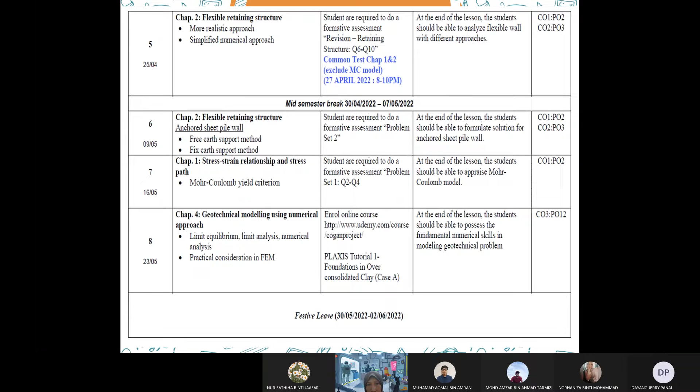This will consume 4 weeks, from week 8 to week 11. Then week 12 to week 14 covers applications of Eurocode 7 in geotechnical design, where you will see how we design retaining walls, and how we design shallow and deep foundations using the Eurocode standard. Previously if you looked at chapter 2, we designed retaining walls using the gross method, the British standard method.

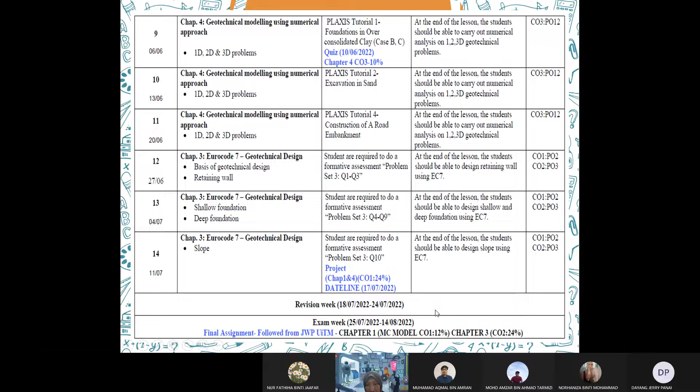So that's all for what we call the lesson plan. It's important that I share this lesson plan with you. Then okay, a little bit on the OBE.

Where is the OBE? Okay, I already shared one PDF on OBE. And if you look here, I've also attached the QR code for OBE. So I think you need to take your personal time to review what is in the OBE, for example what CO1 is, what PO2 is, what PO3 is. I hope you are familiar with it.

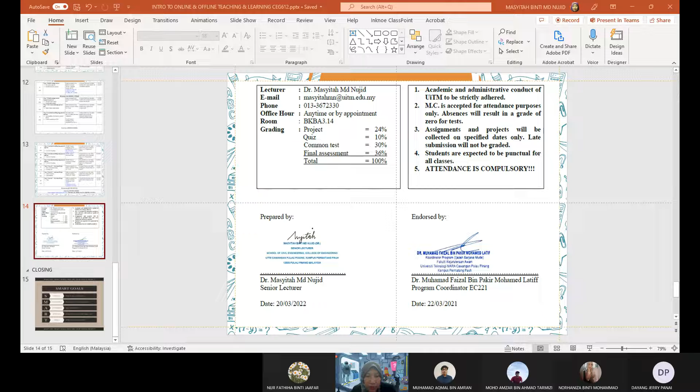Okay, now we go to the first overview on the topic for this chapter. So I will go to... okay, this one.

Before we go into more detail on stress and strain response, I think the stress and strain response is quite familiar in civil engineering. If you remember when you took construction materials, then reinforced concrete design, all that we talk about is how the structure responds when subjected to loading. These are the things you have to understand, to differentiate how the material will behave for different kinds of properties such as concrete, how it reacts when a load is applied.

And when we talk about rock, we have hard rock and soft rock. And also soil, there is normally consolidated clay for example, and over consolidated clay. Then there's sand which is dense type, and also loose type. So how do we look at, in soil mechanics specifically, how clay and sand, these two major groups, behave or react once subjected to loading, whether low loading or high loading.

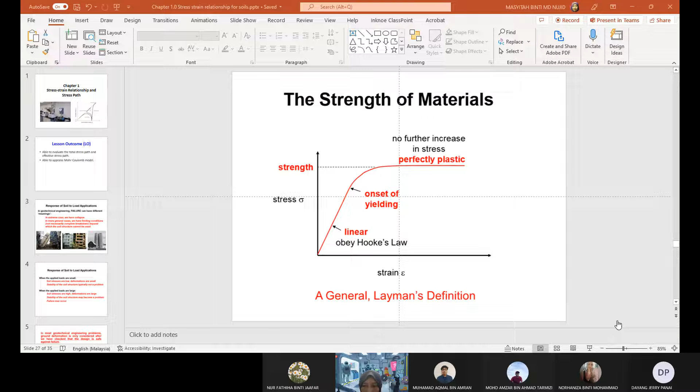Yes, sorry, uh, Madam gerakkan slide ke? Tak jadi, dia tak gerak kat slide. Nombor berapa ni? Tak pasti daripada awal, the strength of materials. Yang mana? The strength of materials. I think there's a problem yang mana dia mungkin tak boleh view as a large full screen view. Kalau yang ni nampak? Still tak gerak lagi, still tak gerak. Let me check what's wrong. Okay.

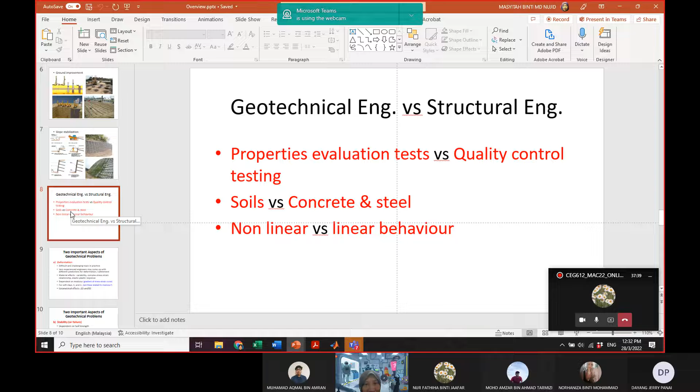Kalau yang ni? Sekarang kat geotechnical engineering. Okay. Alright. Thank you, Madam. Saya besarkan, nampak? Nampak, Madam?

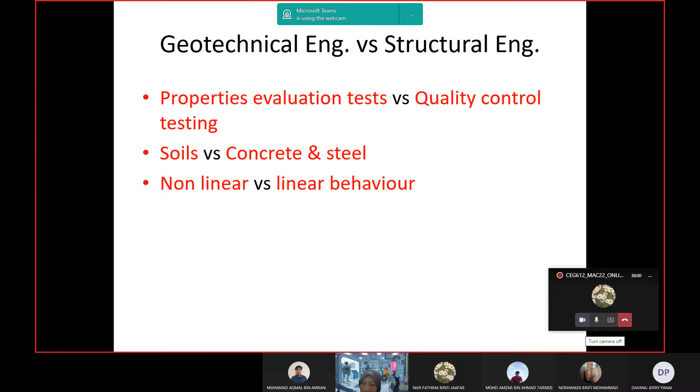Okay, so back to last time, I stopped at the comparison between geotechnical and structural engineer. Don't worry about the slides, I will share later or you can download from UFuture. Okay, in geotechnical aspect, there are two things you may need to consider.

First is the deformations and the stability. On the part of deformations, we play around with the soil characteristics and properties, and how the soil responds under different loading, whether saturated or unsaturated, or whether it is drained or undrained. These are things you need observations or detailed analysis on, how it deforms and how to maintain its stability. So it is a very difficult and challenging topic in practice, and it needs a very experienced engineer to predict or solve any problem regarding the deformations.

Talking about deformations, if we go to the next topic, stress-strain behavior, there is one parameter we call the strain. Strain is one indicator of how you are going to measure the deformations. The strain itself is the change before and after to the original shape of the material after you apply a load. From there you can get the percentage of deformations, whether small deformations or large deformations.

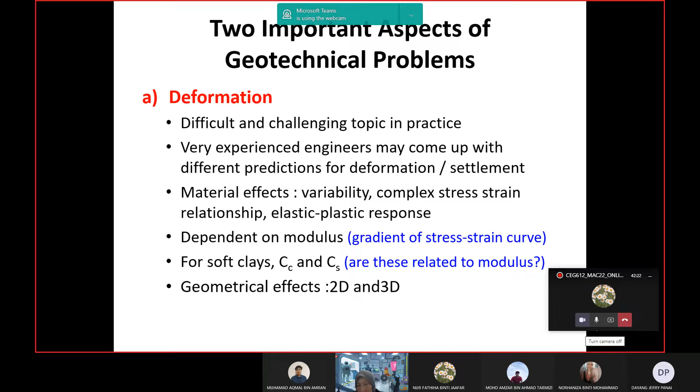Okay, about the stability, so it depends on the soil strength. When I highlight soil strength, you should be familiar with it - the simplest one is the Mohr-Coulomb, for example. If you don't remember, just go back to your textbook on soil mechanics and look at the common things about strength.

What is the strength? Does it have only one strength, or can it have a peak strength, residual strength, and ultimate strength? How do you want to identify all those strengths I mentioned from just one curve, from the stress-strain behavior? Where do we call it peak strength? Where do we call it ultimate strength? Where do we call it residual strength? Because all the strengths I mentioned rely on the stress-strain behavior. If your deformations occur in small displacement, what do we call that?

Ultimate strength, or we can call it peak strength, or it is residual strength. But if the strength occurs in large displacement after a few years has taken place, so it is no longer ultimate strength, it may become residual strength.

So just go back to your textbook, open it up and turn to a few pages, look at the definition of strength, and then what are the parameters that control the strength of the soil. So you will see the comparison of how it behaves for sand material or for clay soil.

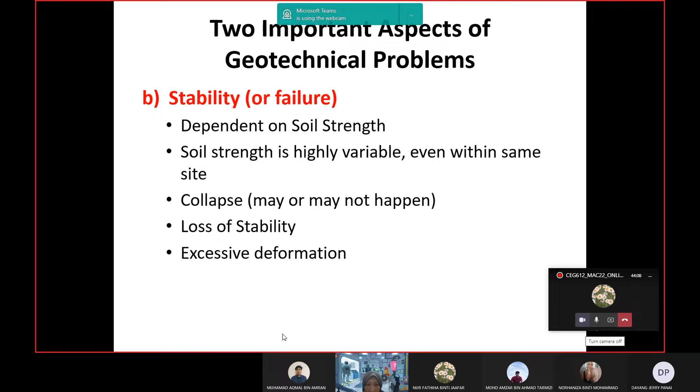Okay, among them: collapse, loss of stability, then lastly, as I said, deformations. So next is on this one.

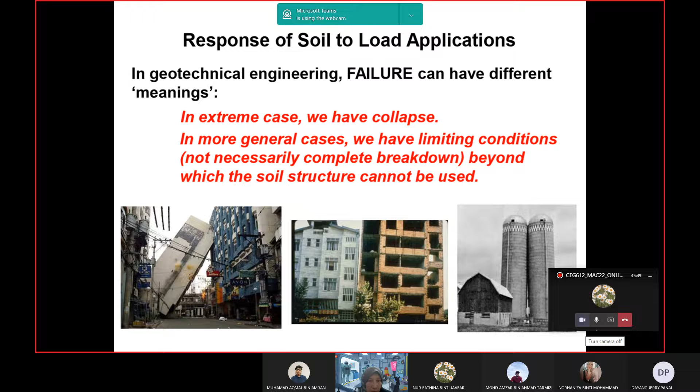As I said, I already mentioned this just now, talking about small strain, large strain. How small strain and large strain are related to loading and also related to stress. So usually when you have soil stresses that are very low, they also produce a small strain or deformation. So of course there is no big problem.

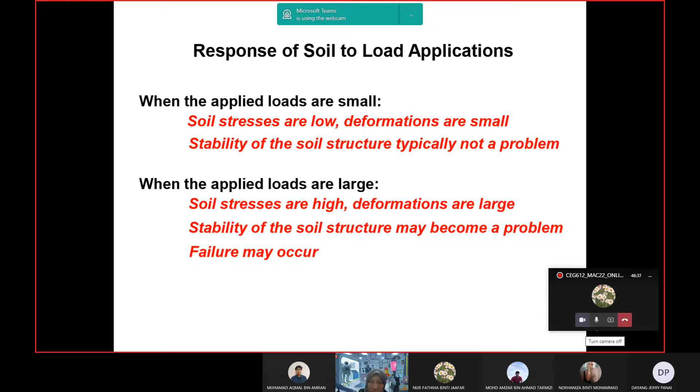But then when you apply a large structure or large loading, there is a chance to have a large deformation or large displacement. So this is the time that you need to consider the failure that may occur.

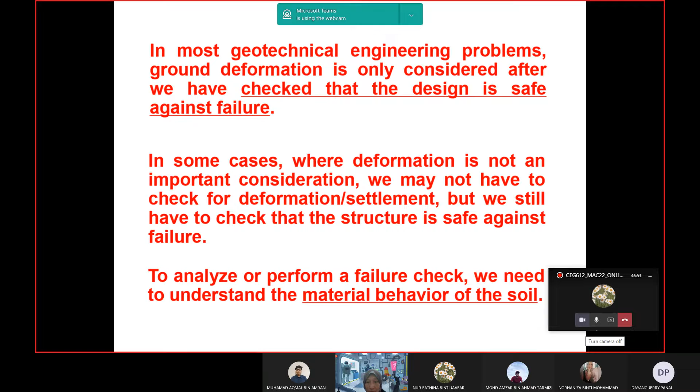Okay, in geotechnical engineering, as I said, you have to check on the design, then you need to do supervision and monitoring, and then you have to do some investigation to understand how the material behaves. And it also depends on two things: the first one is the stiffness and also the strength.

Okay, what is the stiffness? The stiffness of material defines how much deformation the material will undergo given a certain stress, or more appropriately in soil, the stress increment.

Such stiffness as you usually hear is the Young's modulus or shear modulus. The Young's modulus is easier because we can see it on a linear line where you have a linear relationship. But some materials don't behave as linear, they behave as non-linear.

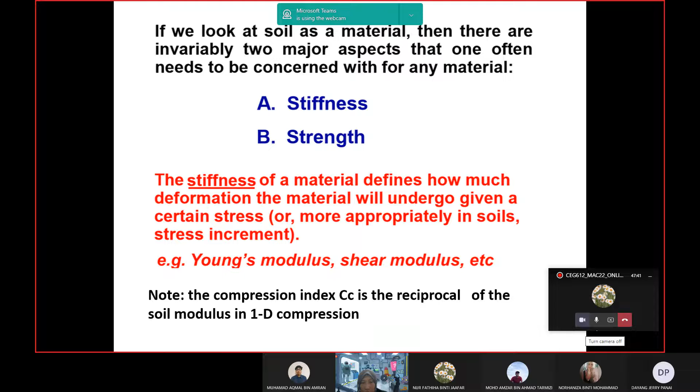So where do we get the stiffness of the material, where can we get the material from? Some of it is represented by the compression index, CC. That's how we can say the stiffness and also the strength of the material.

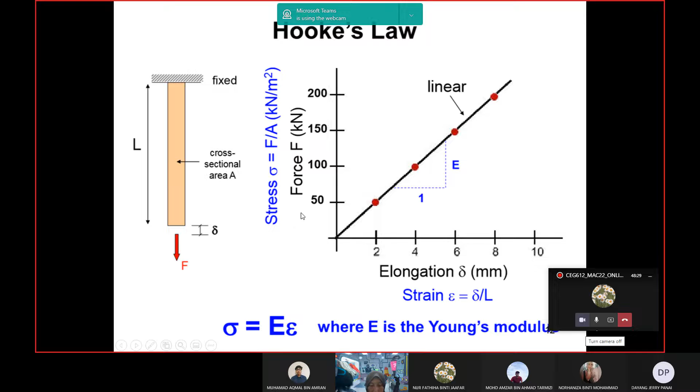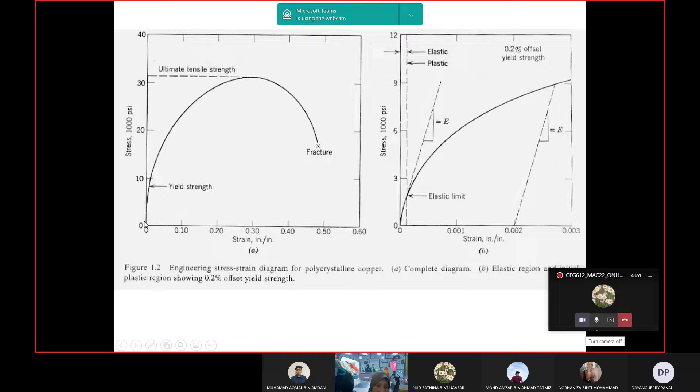Okay, this is one example of how the material behaves under loading. So you can see that some of the curves, some of the stress strain behavior, does not begin with a straight line. It can begin with a curve, or for some materials we can clearly see its linear relationship. Somehow the material can show you the ultimate point and then show you the maximum and also the critical point.

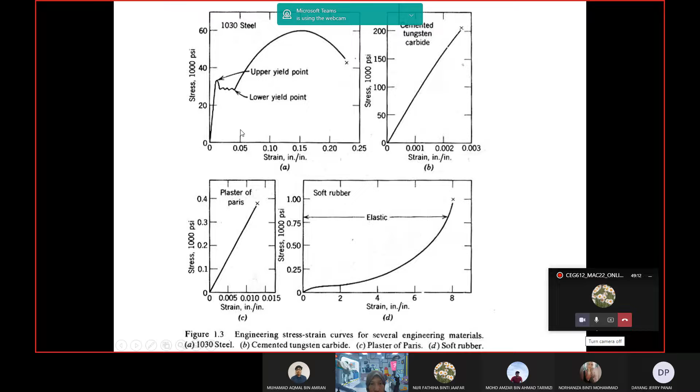So all these things you need to differentiate in order to explain the behavior of the material in terms of the stress strain relationship.

Okay, this is just a simple explanation. Some books call it ultimate strength, some books call it peak strength. But if you look at textbooks on soil mechanics, at the peak or maximum point on the curve, we don't call it ultimate strength anymore. We call it peak strength.

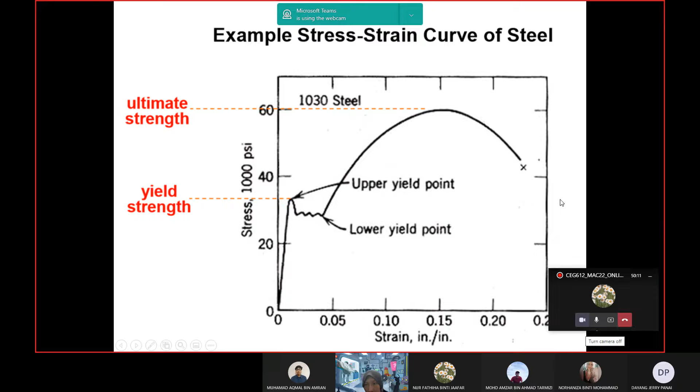Where does ultimate strength occur? Ultimate strength is when the stress or loading experiences a slight reduction, then the shape changes again - that is the condition where you will see ultimate strength. And then at one time when you see the stress and loading does not increase or stays constant linearly, at a condition where strain continues to deform or have displacement, that is the point called residual strength. So they are not the same - peak strength, ultimate strength, and residual strength.

So these are examples of the stress strain behavior of material. I said material, not stress strain behavior for soil specifically. Among the behaviors you can see representing stress strain behavior, for example linear elastic. You know why it's called linear elastic? Because it's a straight line relationship between stress and strain.

Then there's also non-linear elastic, also elastoplastic. Elastoplastic is where the material behaves elastic, then they can behave as plastic. So there are two conditions. And the material can also behave linear elastic, perfectly plastic - for example if we want to model soil behavior, or elastoplastic strain hardening, or elastoplastic strain softening.

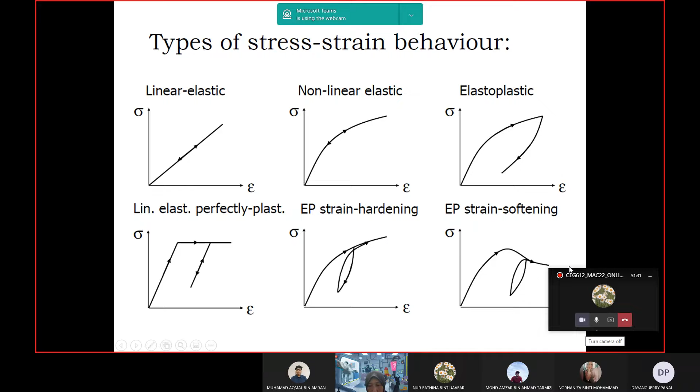Just to show you the difference between tangent modulus, initial modulus, and secant modulus. Secant modulus can be seen at the peak of the curve. Tangent modulus we can see at this tangent position, on the tangent curve. On the curve we take its tangent, so we get the tangent modulus. Secant modulus, if I'm not mistaken, can also be considered called E50 there, secant modulus.

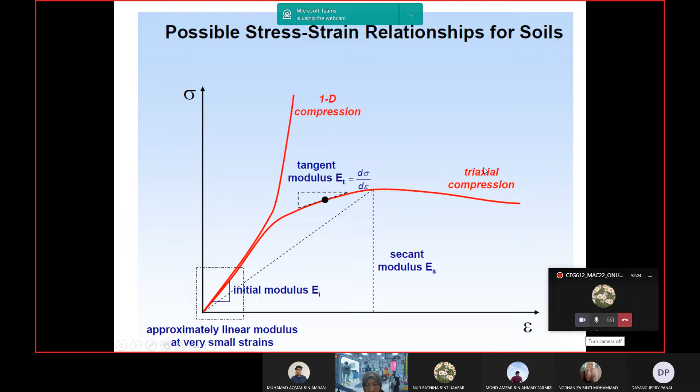Or this we can check again. One more is called initial modulus. So in soil testing we can get the stress strain behavior from one dimensional compression or triaxial compression. Triaxial compression is the thing you commonly do in triaxial testing.

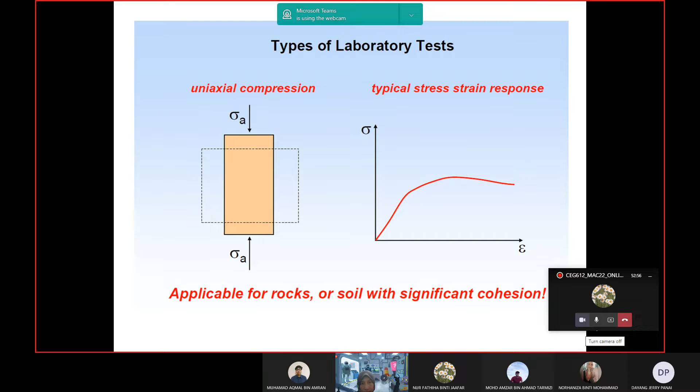So these are the laboratory tests, for example uniaxial compression and also the typical stress strain response. This is applicable for rock and soil with significant cohesion. Okay, similarly at this part you will see the difference between uniaxial compression and triaxial compression. In uniaxial compression, you are only subjected to loading axially - that's what we call uniaxial compression.

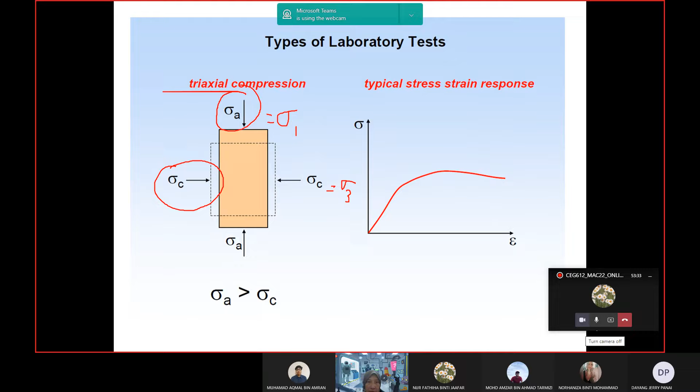However, when you have what we call triaxial compression, you will have axial stress or axial loading, then you will have confining stress. In geotechnical engineering this is called sigma C, the confining stress. This can be similar to the major principal stress or sigma 1. This is also similar to sigma 3, confining stress. In triaxial compression, you will see the axial stress is larger than the confining stress.

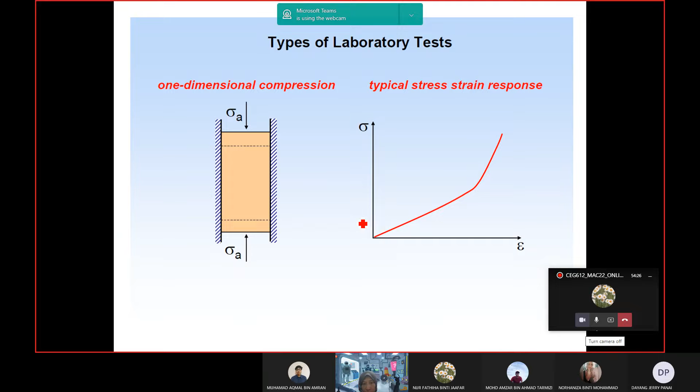Okay, one dimensional compression - why in this area, remember when you do a 1D test, we confine the soil's deformation laterally, meaning the soil cannot deform horizontally, but the soil can deform vertically. There you will see the change in thickness from original thickness to final thickness. So when you have the difference from final thickness to original thickness, you see the settlement or vertical displacement. That's why in one dimensional compression test, you have boundary conditions laterally - there is no movement in horizontal or the x-axis, but you allow for deformations in the vertical or y-axis.

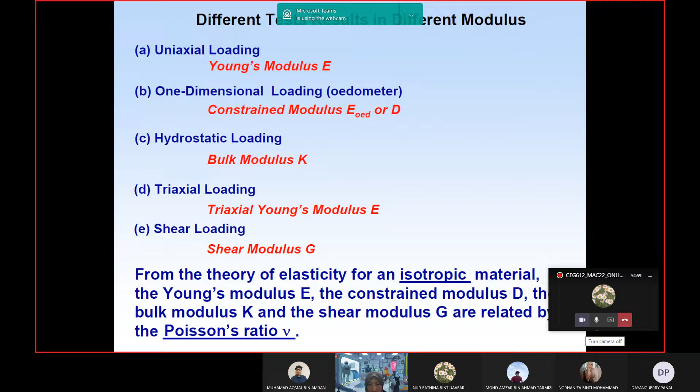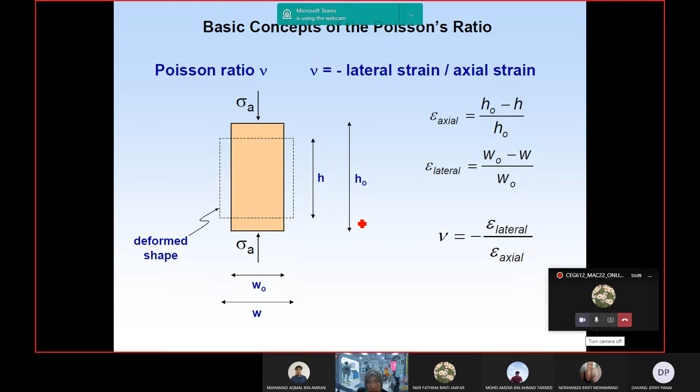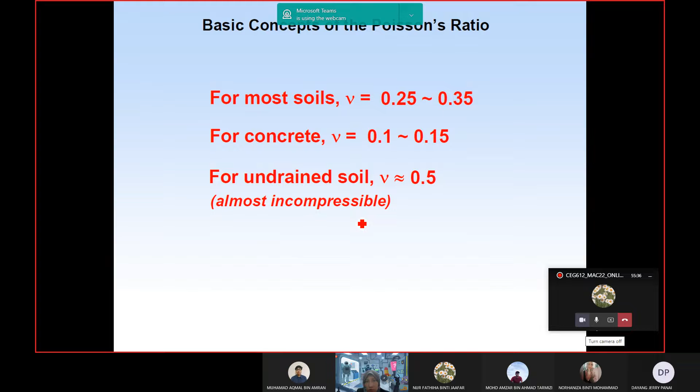Okay, ini adalah refresh balik konsep untuk Poisson ratio, macam mana kita nak calculate Poisson ratio. Bila ada deformation, mesti ada Poisson ratio. Ini adalah contoh typical value Poisson ratio untuk soil, concrete dan juga undrained soil. You can see that the Poisson ratio for soil is the larger, 0.25 to 0.35. Kalau compared to the incompressible ataupun undrained soil, dia punya Poisson ratio is 0.5. Yang mana soil tu lebih large deform compared to the other material such as concrete ataupun most soil yang lain.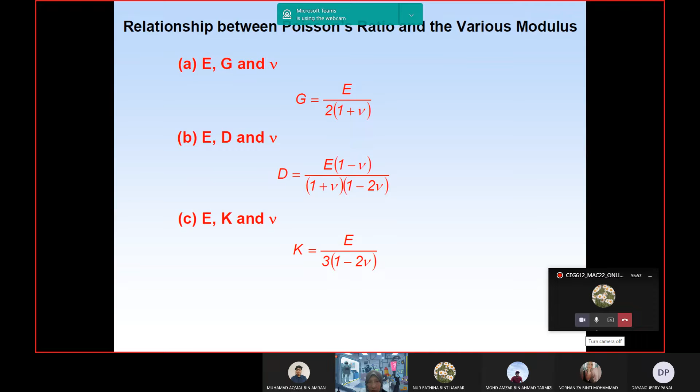Ini adalah relationship how you may have the value of shear modulus, for example, ataupun bulk modulus K, ataupun you want to have the D. So by having or rearranging the equations, you akan dapat all this particular parameter. Example ni nanti you go through sendiri because this is very straightforward calculation. You just substitute the value of the parameter to the formula. So you may have that one.

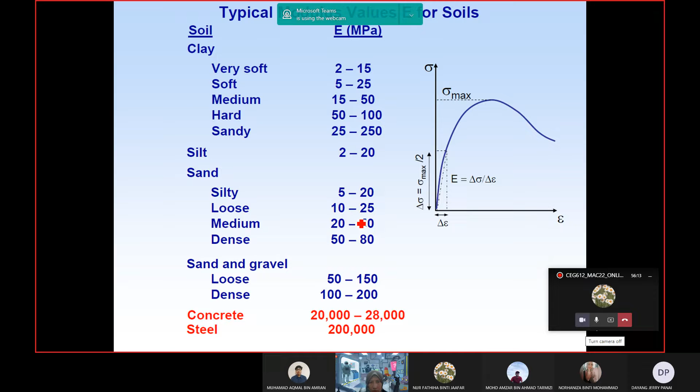So these are the typical values also. Young modulus for clay, silt, sand, and concrete and steel. So the strength of the material. We're talking about the strength when it reaches to the fail condition, the failure of the conditions.

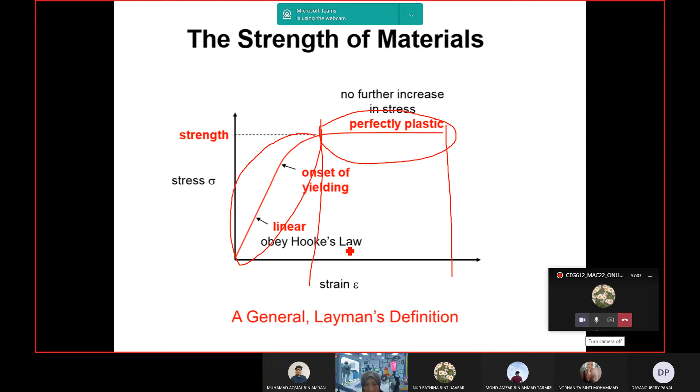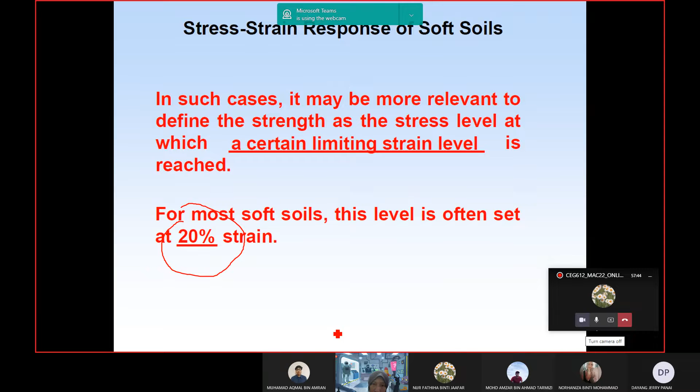Okay, untuk if you remember bila kita buat triaxial test kita ada limiting ataupun indication yang mana the soil has reached to the failure of deformation. So we set here at 20% strain. Ataupun kalau you remember when you record the data, kalau 2-3 data terakhir tu bacaan dia constant, so we can assume that the soil has failed due to the subjected loading you apply. Ini yang dia maksudkan 20% of the failure strain tu.

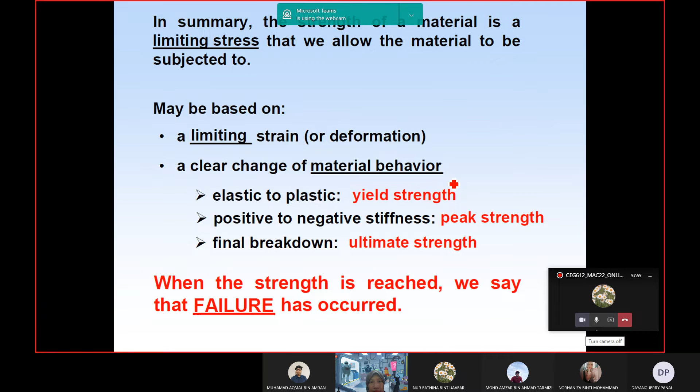Ada soalan tak? Okay, untuk yang minggu ni saya dah cover overview stress strain. So the next following weeks is a more tough sebab kita dah masuk kepada stress strain path, yang mana kat situ you akan nampak macam mana tegasan berubah daripada total stress dan juga effective stress kalau dia ada some value of the pore pressure. So the stress path is a region ataupun satu plot yang menggambarkan laluan tegasan tanah apabila dia dikenakan beban.